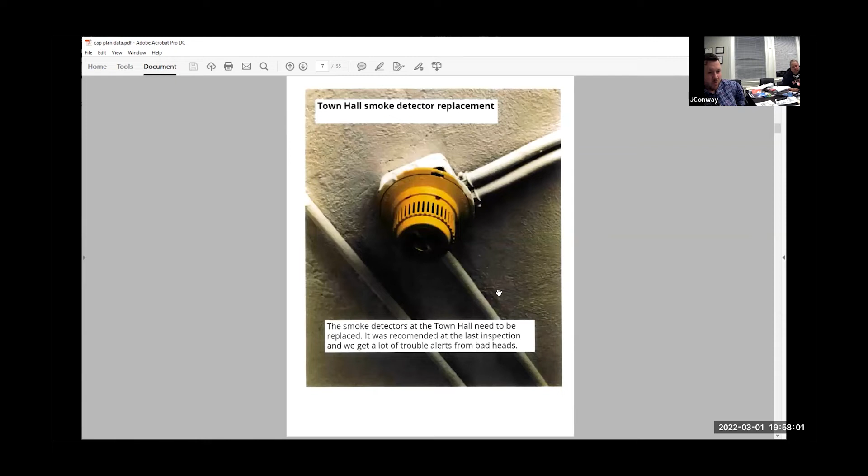This is an example of some of the hardwired smoke detectors that we were talking about earlier.

This is one of your 12 panels that would be infrared scanned.

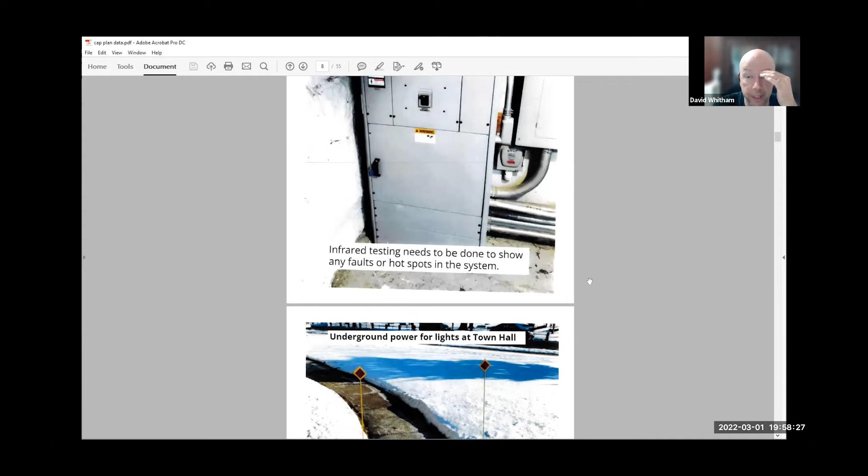And remind me, so that's 25,000 to scan one building? Yes, all the panels in the building. How many panels? There's 15 plus. Okay, I'll get you the exact number, we'll count them all in the closets. So it's scanning to see if there are any potential issues, so that 25,000 covers hot spots. All right, so the 25,000 is a worst case.

I had to do this, you know, and it is residential, so I get it's different, but I think it was between 4 and 600 for one panel, and you multiply that by 10, you get 6,000. Maybe you have 20, that's 12,000, that's still half of the 25. That's the only reason I'm asking, plus that kind of raises a flag to me for that level for one building, right? If it was for more, I get it, you have to take the prevailing wage as well. You don't have to pay for prevailing wage at home, so the price is going to be a little more expensive on that. But there's probably 15 plus panels in this building, and they're a very large panel. Yep, the only thing I'm saying is that's over $1,000 a panel.

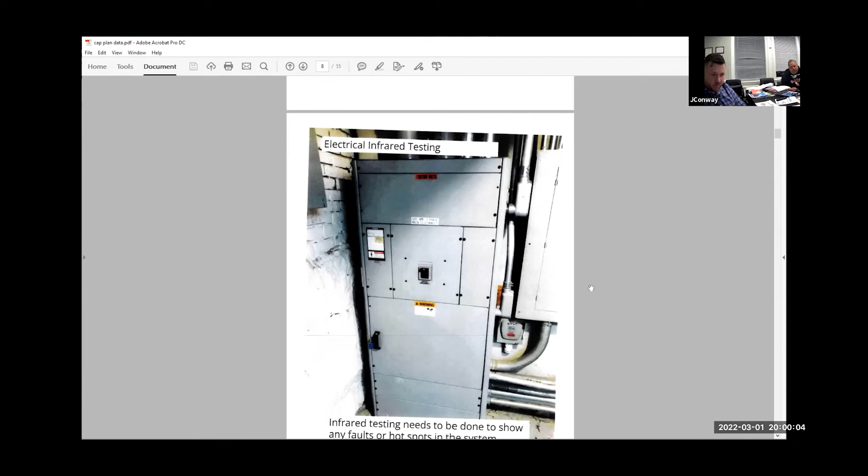We'll touch base with the electrical contractor doing that, and see if we can get the pencil to sharpen up a little bit. Yeah, that's good information, thank you.

This is just an example. So to the right-hand side of this picture is where the flagpole and the sign are. This is literally where the extension cord runs right over the walkway in lieu of underground conduit.

And so there's the flagpole there, and then I would imagine we're going to get electricity to the sign as well. Yep, which will probably be a stub coming out of the ground somewhere in the area of the bush, hidden out of sight, similar to what we have across the street of the common.

But why does the flagpole need a light? Is there some state regulation? Yeah, all flags that you fly at night have to have a light on.

But you said you're gonna leave a power pole box out there too, to power Christmas lights and other things that you're gonna put on the lawn. Exactly. Typically, even on the common, anytime we've ever done any electrical work, if we could add a locked power box out there, just for the future, we typically will. Certainly when the World War II memorial came in, right behind it is a pedestal with some outlets and stuff. So we would probably do something similar to that here, just so we have it.

That's not something you'd sub out, right? You'd have, when you had a chance, you guys could excavate for that and then have the electrician put the conduit in the ground, right? For 5,000, it looks like that's all you're gonna do, right? Yeah. Okay, probably talking a day's worth of trenching and 2 4x4 panels at the end of it, plus conduit.

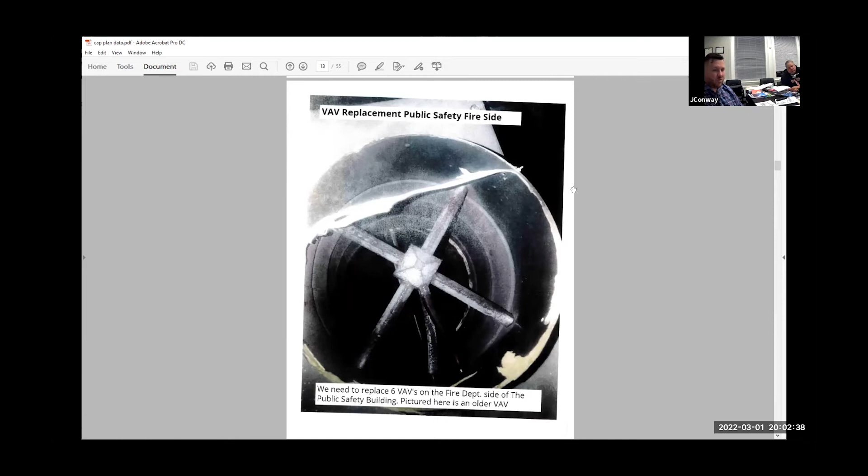Here's an up close look at the VAVs that would be replaced. That's an old one right there that you're seeing. And then the next picture, I believe, is the new one.

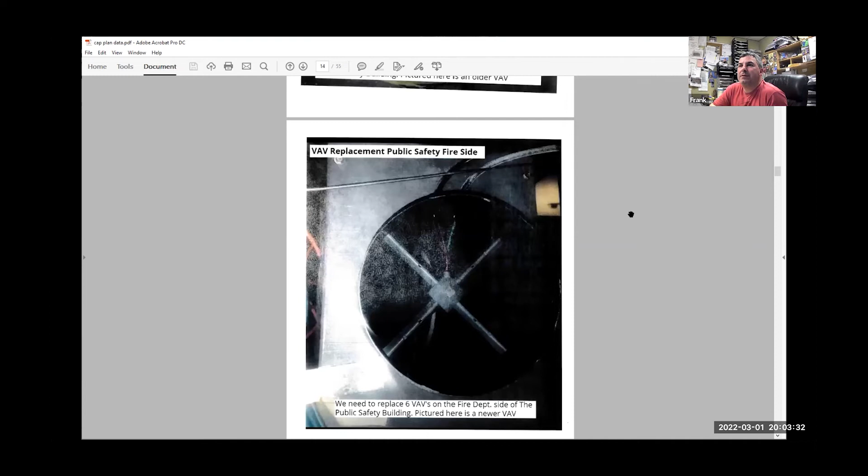And Joe, I know you said that you looked into these items for the renovations. This is one of the only parts of the HVAC system that's not gonna get touched. We went to them and we asked them exactly where they were doing it, and then we took it from there and went through the fire side and picked up all this.

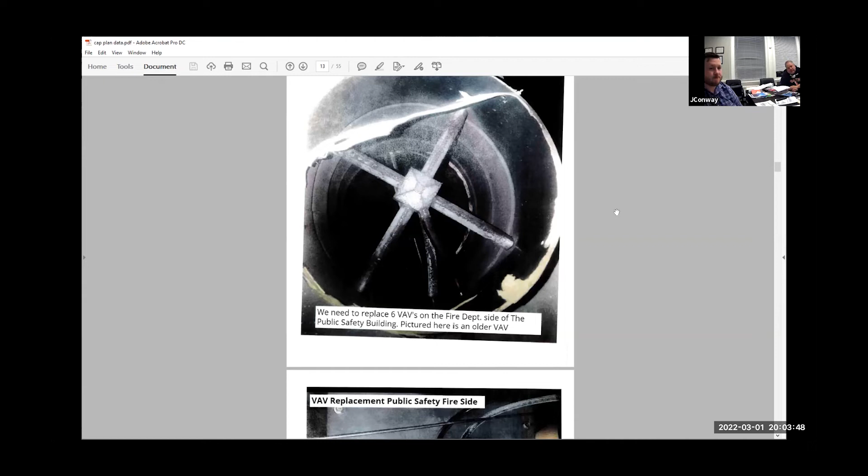As far as the budget goes, you can't just extend it a little bit and ask for a little bit more money under that project so it doesn't come under capital, since you're doing the renovations anyways. I think it's like a thin piece of bologna over there for that project, they're really tight on the money. I'll default to Phil when he returns from vacation, but I think for the recommended funding amount for this...

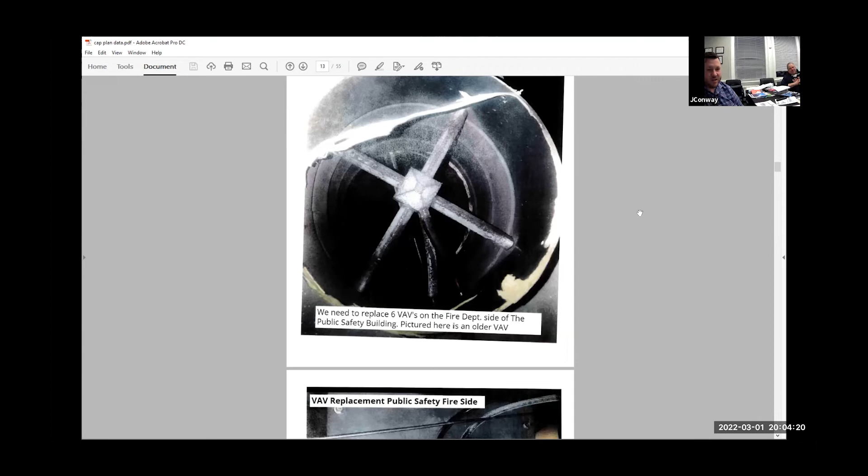Yeah, it's not that bad. I think they have larger fish that they're trying to fry right now and some of the other stuff.

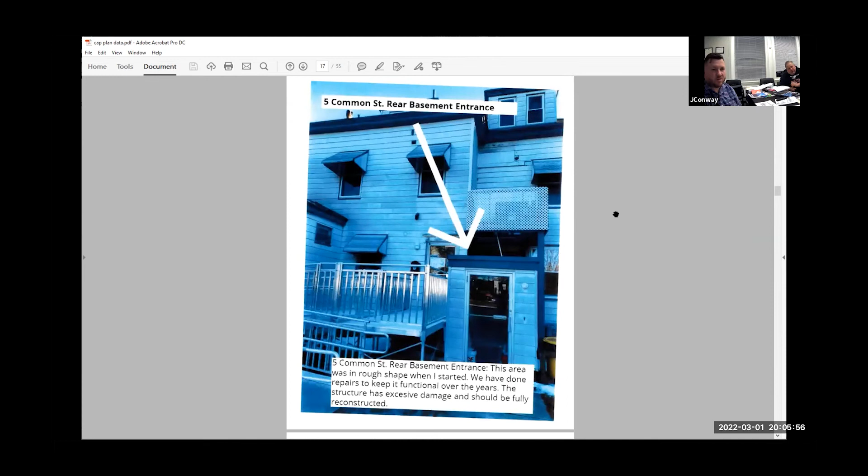This is just another picture of that doghouse. Here's the inside. So all this black is actually water damage coming into it.

If you walk down the stairs, and again, if anybody wants to tour it, we can. The treads themselves, I would say, are a little spongy. I wouldn't feel completely comfortable lugging a heavy load through here.

You can see as you go through the first door, you come down to the set of stairs, and you're greeted by a second door here. There's 3 steps to the left, and then you're in the basement. This is just all texture 111, T111.

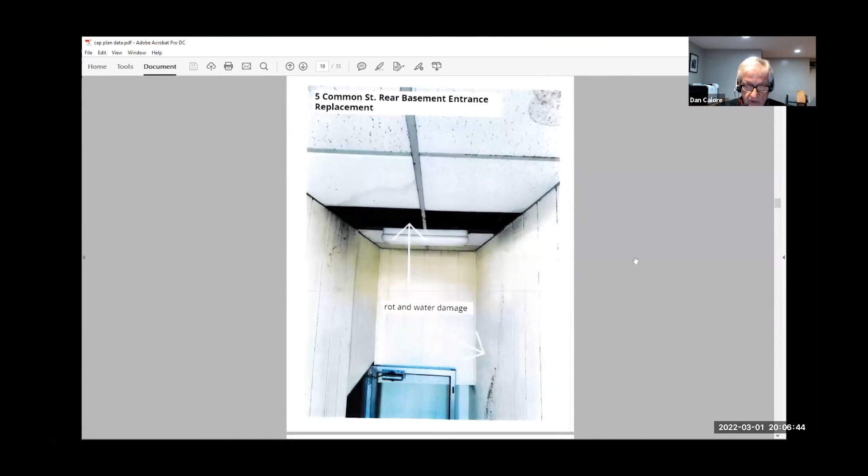It's just an example of some more of the damage you can see. It's just showing you the roof.

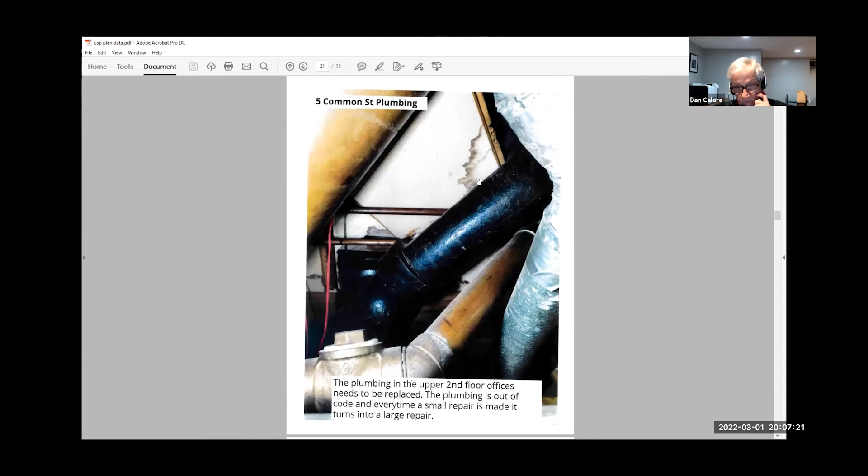It isn't exactly the easiest to get to. So by avoiding some of this and getting it a little more user friendly, would certainly help things go along with that building.

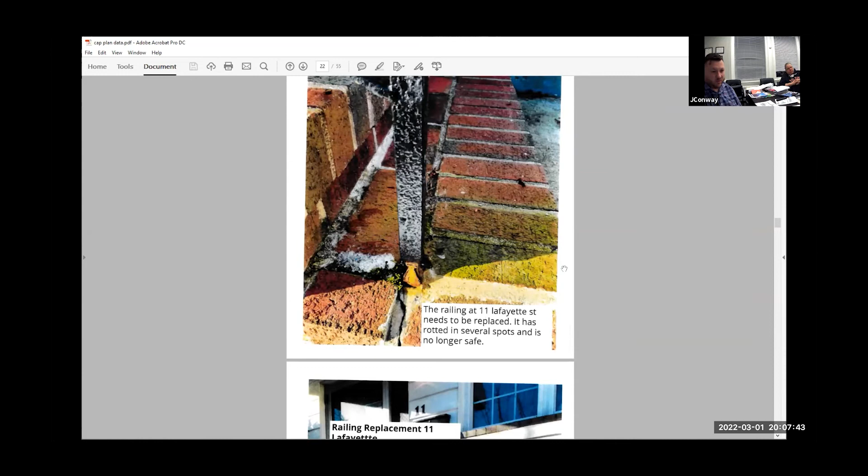Same thing like Town Hall. This is 11 Lafayette Street where the bricks and everything are wearing away from these railings. This is actually rust on this. At some point in time, this will probably rust off completely. I don't believe it has yet, but it's on its way.

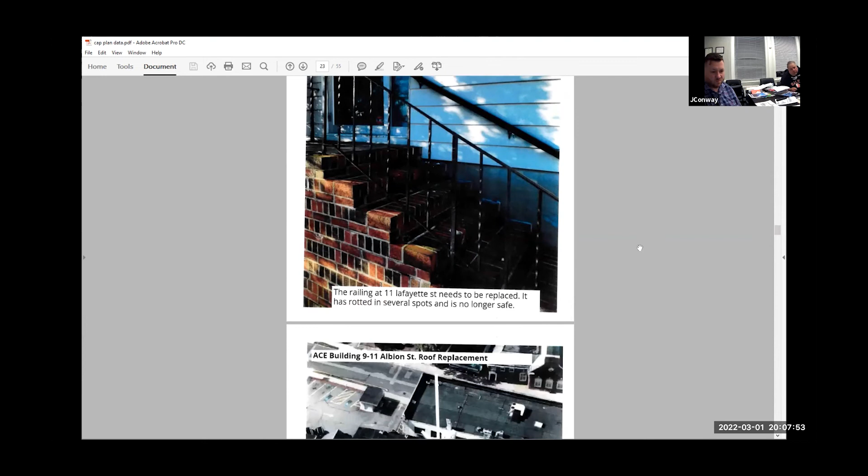This is an example of the railing that's headed in. This is just a picture of your roof at 9-11 Albion, Ace building.

Hey, Joe, I'm sorry to interrupt. The railing, you just want to replace the railing and nothing to do with rebuilding the bricks? No, we'd have to pull the bricks out and repoint them. But just where it involves the railing, you don't have to redo any of the other stuff.

Any of the other treads or anything? Honestly, Frank, if we were gonna do that, we'd think about pulling the whole thing off. That's what I was saying. So you're just looking at the railing with this cost.

What is it, by railing, $6,000 just to do the railing? The railing and then to repoint whatever's holding it, all the bricks. Yeah, okay. To do the whole set of stairs, you're probably looking at, what, 25,000?

Probably. I think the fire escape set was in that wheelhouse. It'd be a little bit smaller, but the current inflation right now.

You think they're in good enough shape though, that we're not gonna be replacing the stairs in 5 years if we do the railing? No, and this building, right now, it's used by IT.

Okay, that's all I'm asking. I don't wanna do the railing and then, 5 years later, say, the rest of the bricks are falling apart, water damage, if there was frost. If there was any inkling of that happening in the future, we would be coming and asking to demo the whole thing and redo it.

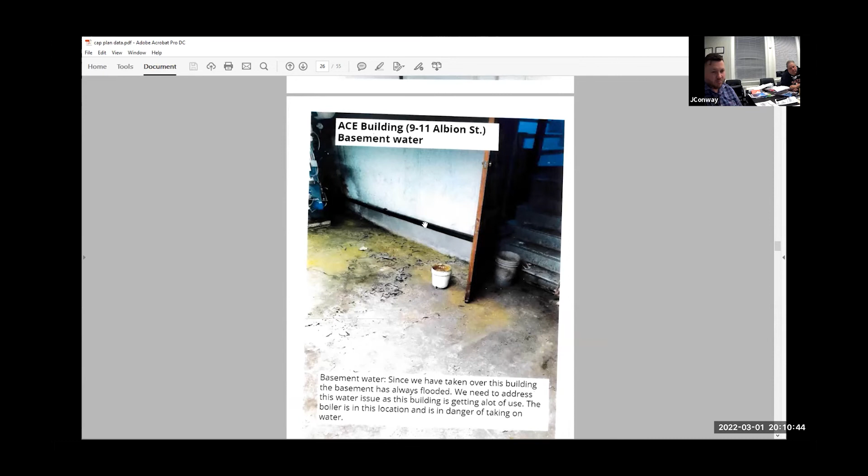That's the basement? Yeah, correct. So this is your boiler to the building here. Some of the areas where all this staining is, essentially, groundwater that's gone in.

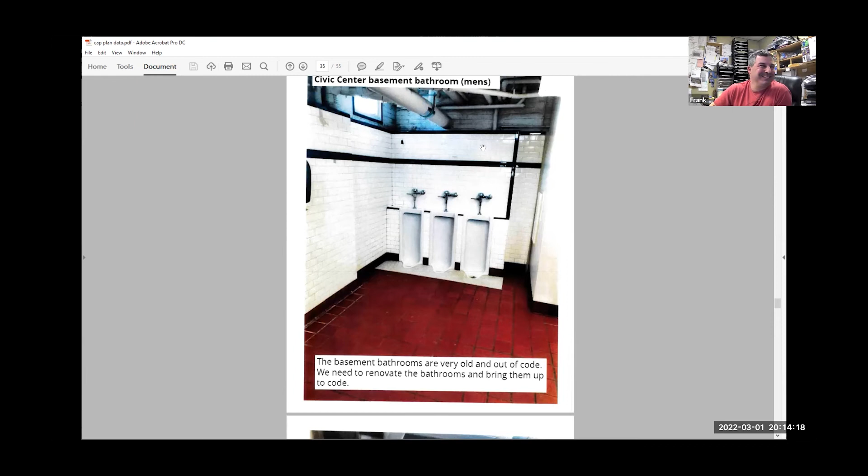And then I had mentioned the bathroom. So as an example, this is the men's room. I'm only gonna guess, but these urinals are probably old, Fenway Park style. There's nothing wrong with those urinals. No dividers, though. Although I think the subway tile is probably back in now. That's why you'd see some in the subway.

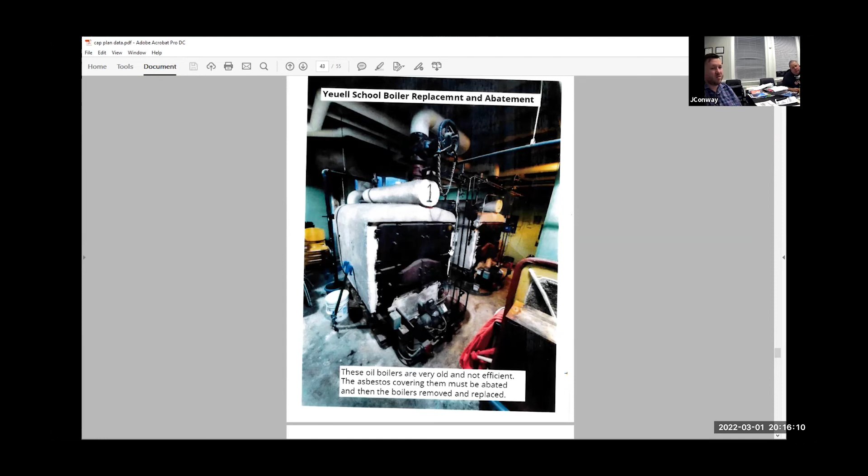All of this white on the boilers at the Yeuell School is all asbestos. I don't believe it's in a state that's harmful, it's not friable, it's still intact. The only thing is if we were to decommission these boilers and change them, it adds an element to the project. We'd have to abate this and then have hygienists clear the building before we could move on to the next phase. These are all iron underneath, the old iron boilers, big and heavy.

Just another picture of it. We'd need to get abatement for the asbestos.

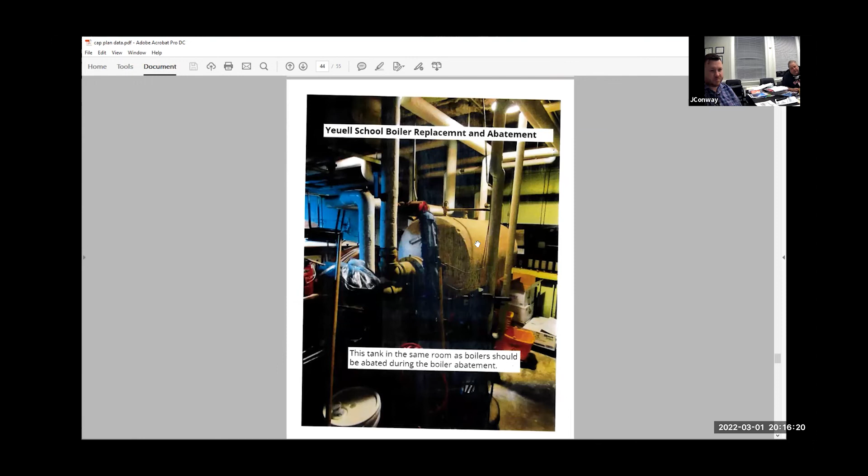Would that cover all the wiring too for the hallways? The 10 grand would cover wiring for those signs as well? Yeah, my electrician would do that, he'd wire them all in. Would it just go through the drop ceiling, or would it be on the outside of the walls? It would come out through the drop ceiling.

Who uses the Yeuell School now? I believe it's a collaborative, it's a private school, they rent it from the town, for challenged children.

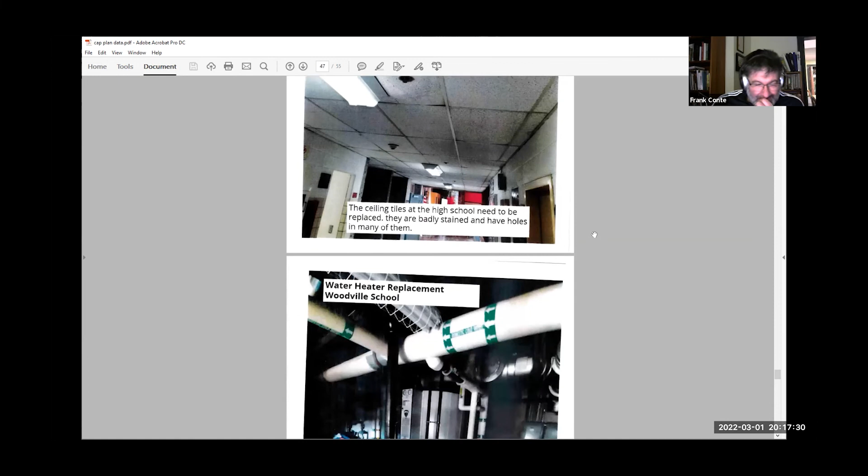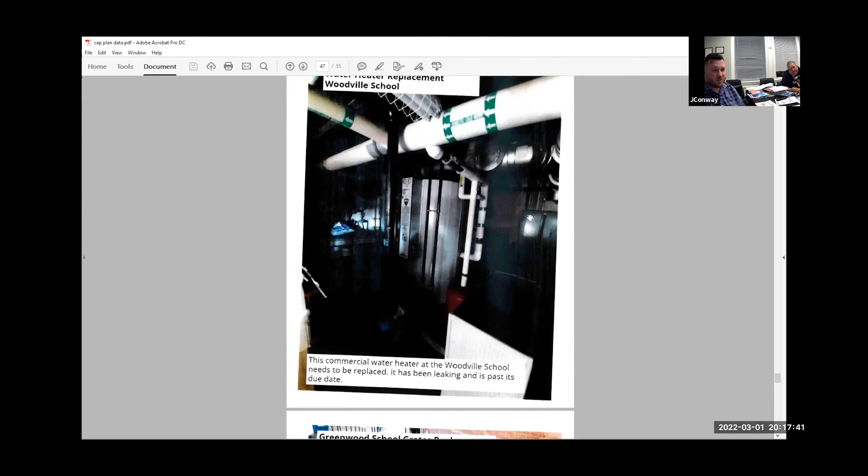There's your hot water heater in the Woodville. You can see it's not your average hot water heater, it's a large commercial water heater. Like we mentioned, we'd essentially be buying the parts and then our staff would do the install, just like the building.